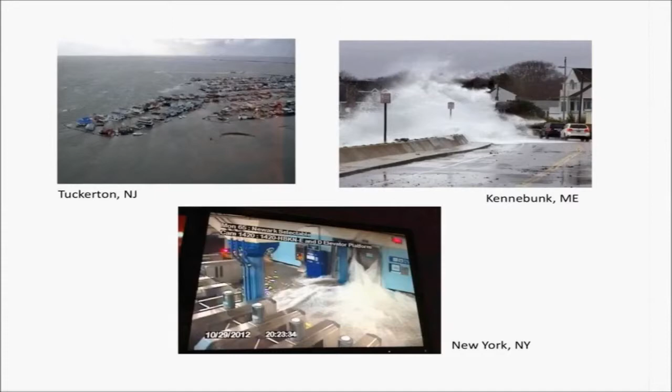So let's just jump right in. I'm going to start with an assertion, which is that I don't actually think we need more tools. A lot of people are saying, so what are the lessons from Hurricane Sandy? People say, well, it was widespread and had cross-sectoral impacts and so on. But I don't think those are really lessons. Some people say, okay, so we need better tools to help us predict. Well, let's look at that as an assumption—I'm not sure that's true.

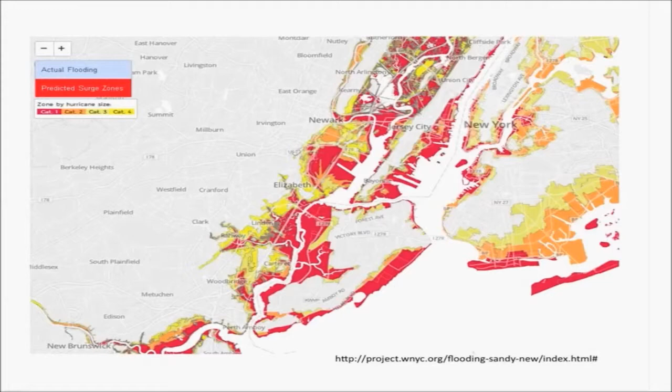Here's a picture of New York just before Hurricane Sandy hit, and a prediction in red of how far inland a storm the size of Sandy would come. Now we'll go to the next slide and show you how far inland Sandy actually came, in blue. So we had a pretty good idea of how vulnerable we were—in fact, that's accurate down to some pretty small areas. We don't need more tools is my general assertion.

We need more conversation in local government, and especially about what kind of action are we going to take. So that's what this whole framework is going to be about.

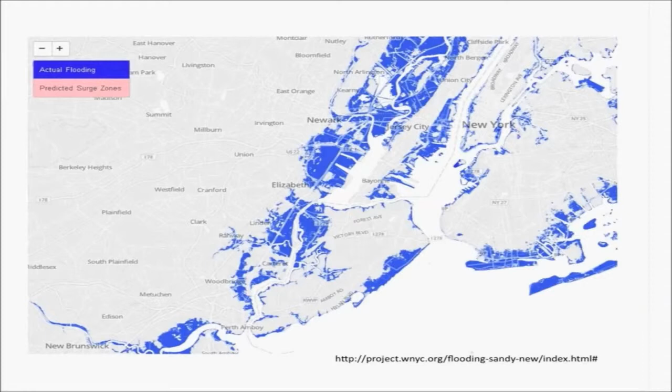Now, what I'm describing has been developed over the last 7 or 8 years here at the Muskie School of Public Service through several organizations funded mostly by EPA, with software work done by Blue Marble, and with a lot of participating organizations in beta testing all around. But applied work of the tool is now happening mostly through the private sector, through this firm, Catalysis Adaptation Partners. And there's a lot of it.

We're just going international now through a National Science Foundation award to the University of South Florida. We're going to be working in Sarasota County, but not just there—also overseas in London and in Santos, Brazil, just outside of Sao Paulo. There are many others domestically coming on, small communities like this that are starting to use and see the benefits of this kind of approach I'll be describing. And again, that's all happening through the firm Catalysis now, although others are free to use this approach.

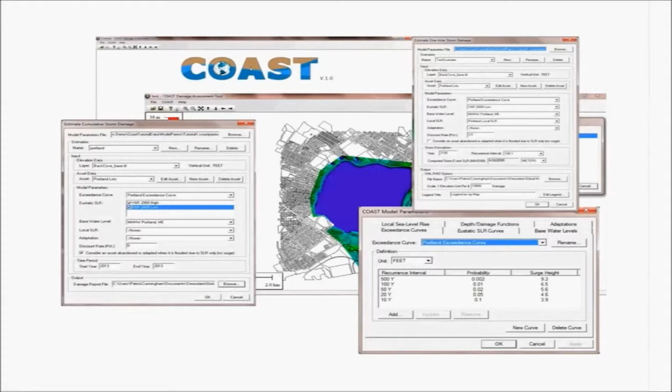And it is a software program that when you download it has dialog boxes and pull-down menus and things. It is a versioned tool that we're doing more work on now—new versions will be coming out on an ongoing basis, and those will continue to be free downloads online. In developing it, we've really focused mostly on the psychology. We've started with looking at why we've had such a problem. We've been talking about the need to take action for 15 or 20 years or more, but it's hard to take action for at least these reasons.

We think we have a lot of time, but we may not. We say 30 or 50 years, but think Hurricane Sandy. Or number two, we don't know how much bang for our buck we're buying with different mitigation actions, and that's unclear.

The actions we might take are themselves complex. We're really not clear what we mean by a rolling easement or wet floodproofing sometimes. These aren't things that are in the common vocabulary yet. And finally, doing nothing kind of works. It's actually easier, and it's what you'd expect if all we can really do is show people two-dimensional inundation maps of just how wet they're going to get, without helping them step through options for themselves.

Because, however, there really are only these options on a per-asset basis, and that's important. You need to be talking about real estate, jobs, natural resources, infrastructure, or vulnerable demographic groups, for example. You can either fortify, meaning modify the flow of water, accommodate, meaning modify the impact of the water—think elevation or floodproofing—or relocate, which might be through rezoning, acquisition, or other things.

COAST, the whole thing, is really a way to help groups evaluate costs and benefits of these options and navigate through that psychological nexus.

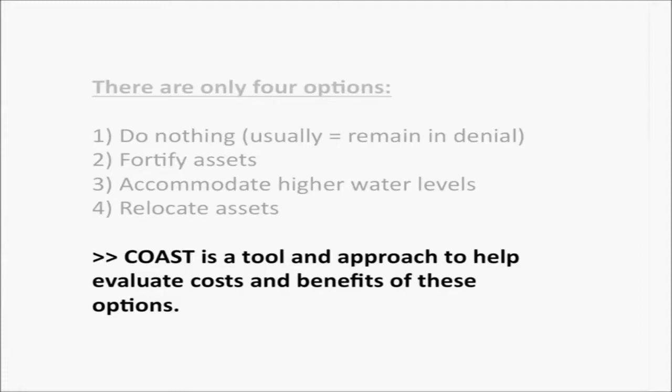And so this whole process is really about recognizing, harvesting, and harnessing that fear and converting it into civic engagement for these options, because we've often said and known that the problem and the opportunity of these sea level rise and storm surge issues is at the juncture of social, economic, and political forces. This whole approach is organized around the notion that harvesting these emotional currents is what is going to help create action, and that's what we're seeing happening all around, and why I think there are so many of these new projects starting up.

So, since I'm saying it's about people, let's jump right in. The process is, first, we engage stakeholders, and they drive. This is central, this is critical to the whole thing. People determine their own thresholds of risk, sensitivity, and tolerance, and that's a neutral and facilitated process.

So, as an extension agent or a company or whoever is going to be working with the community, we would present them with a suite of best available science, recent peer-reviewed estimates of how much sea level rise there might be over the next century, and then they pick. If they think the Greenland ice sheet's going to melt, well, okay, they might pick one range or another, and we'd help step them through figuring that out.

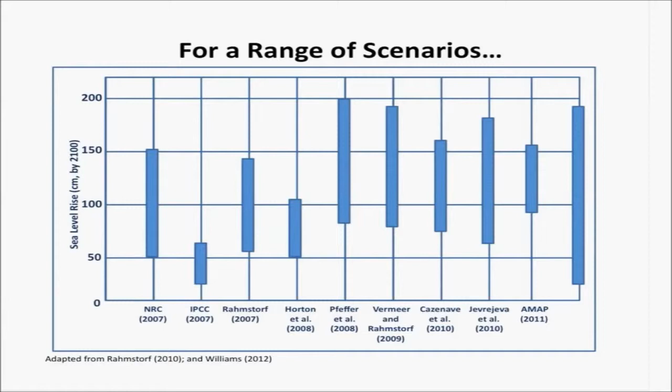And similarly with storm surge, we program how vulnerable people think they are—how big of a storm do they want to protect themselves against? We can use those flood extents from people's memory and from the tide gauge, and we can derive those probabilities and surge extents both from FEMA flood insurance studies, which are available in most locations, or where they're not, or they're insufficient, we can do time series analysis off the tide gauge and come up with our own probabilistic estimates. There are other ways to do it, but most importantly, it is stakeholder-driven.

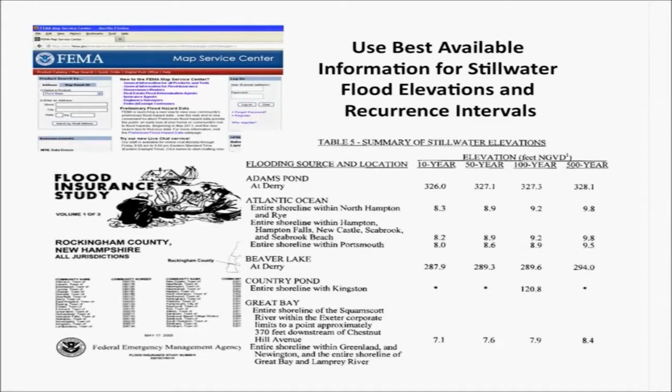People agree on how much impact they want to model, and again, people select the vulnerable asset. Do they want to look at real estate or economic activity? We've published in quite a lot of these areas already, and many of the projects are underway in the others, and there are many different ways to do it. Now, once that's done, you can go ahead and merge, or rather input, the depth damage function, and this is critical to the whole thing.

I referenced it at the outset, that it's in that NOAA document. What it does is it says what percent of an asset's value is going to be lost at different depths of inundation. Now, for real estate, this is quite a robust function, based on millions of insurance claims which say, on average, how much a structure is likely to lose in value for different depths of inundation.

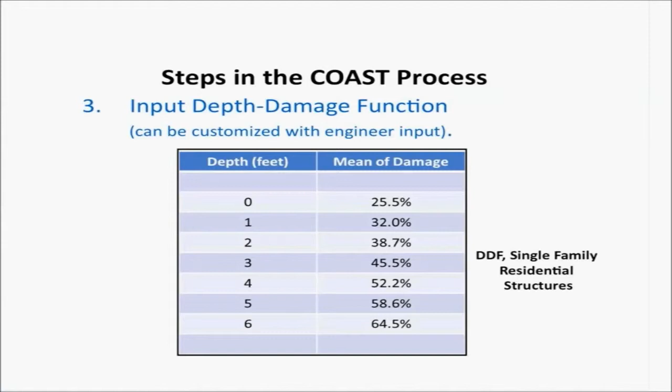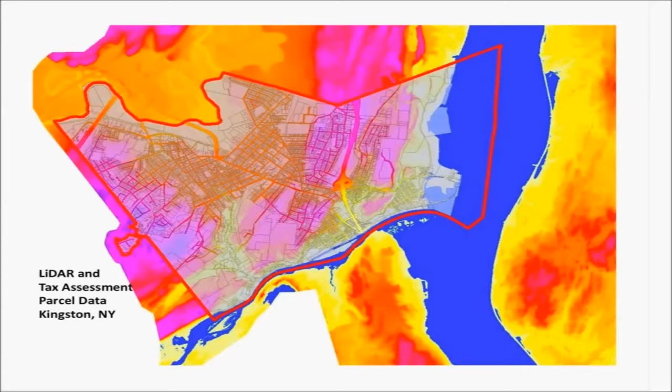You merge that with the spatial representation of that asset layer and the elevation layer in a GIS, and when you run the model, it will estimate the dollar damage for a size storm and project those in 3D maps, calculating cumulative damage for all storms out to that year. Those are different processes mathematically, but you do both at once and get results that help move forward.

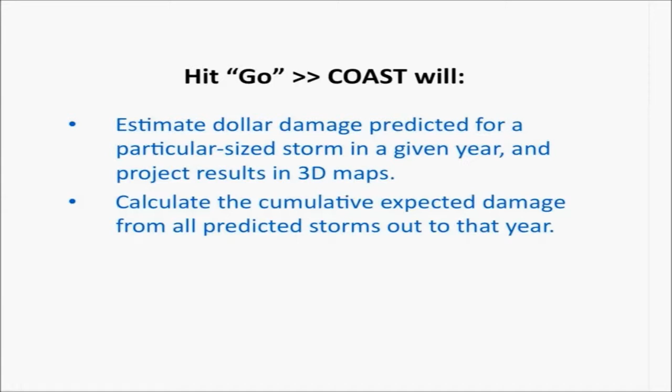So I'm going to give a little case study here, a quick summary up to this point of what this part of the process looks like in Kingston, New York, a place we did this earlier this year. The final report just went in last week, so we can do this relatively quickly.

Here at the top are the scenarios that those stakeholders decided they wanted to look at, and this is their lovely downtown. There's a gazebo in the downtown, and you can look at that from the air, along this shoreline, which is about 85 miles upstream from New York City. This is a little tributary off the Hudson, and they didn't think they were terribly vulnerable from storm.

But a few years ago they got really clobbered by Hurricane Irene. There's that same downtown strip, looking off the bridge, where it was several feet of water right on the main street, and they hadn't been prepared for it. They went and built a seawall around the wastewater treatment plant, and they thought they'd be safe.

But then Hurricane Sandy hit just 14 months later, and the surge was 11 foot. The seawall around the wastewater treatment plant was only 10. So it was a big problem, and they were very interested in engaging in new kinds of discussions.

So we did some modeling there to show what this output looks like. Here's an actual extrusion where those blue boxes show you how much dollar value is lost at each spot. You can click on each one and see how much depth there is and the amount of dollar loss. That's 2013 with no sea level rise.

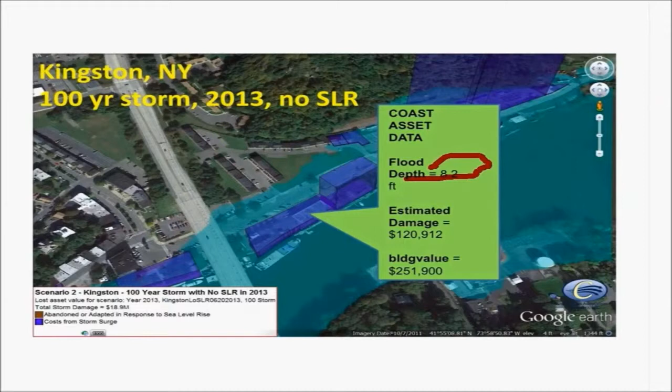So if we add some years and go out to 2060 with high sea level rise, you'll see there's more damage and more depth at each of these sites, and more parcels start getting hit, because the same size surge will come farther in when you add sea level rise.

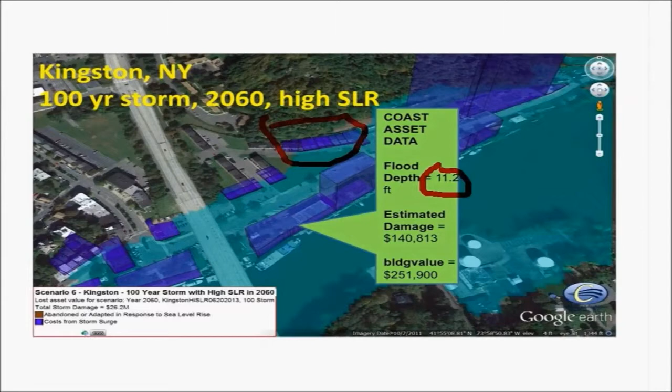Now, if we go out even farther, say 2100, it's very interesting what happens. It goes even farther in, but you don't see bigger, taller blue boxes. Actually, you see flat brown boxes. That's because at a certain point, those parcels become permanently inundated, and it's not reasonable to go ahead and leave that dollar value of the asset there from then on.

What if that had happened in the year 2065? You wouldn't keep tallying all of those losses. That parcel will either be adapted or abandoned. Adapted could mean elevated or relocated, but the point is the dollar value is no longer vulnerable to be compromised in the same way.

So what you do is remove that from the vulnerable asset data layer, and that influences your calculations of how much loss there will be, but that's the way the model is structured. It works on an annual basis with all probabilities of events out through the century, and it operates that way. You can still tell what the total depth is, how much total loss there was, and when that abandonment or adaptation happened for any given parcel.

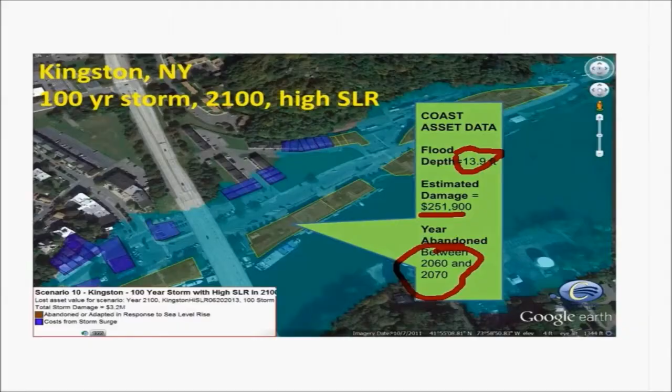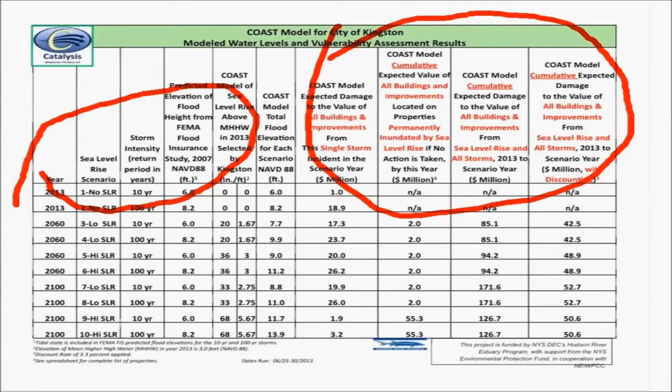And then we can start saying, what might we want to do? Then we'll compare the benefits and costs of taking those actions versus doing nothing. But this is when we go ahead and select the candidate actions over time.

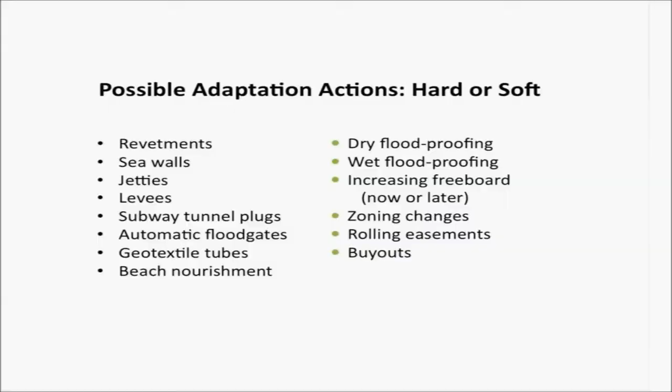That can be a suite of hard structures and approaches, like on the left we've modeled, published on most of these, and on the right as well. And it's very different for different ways of doing it, depending on local public process and regulatory issues and so on. There's a lot involved at this stage in terms of public process.

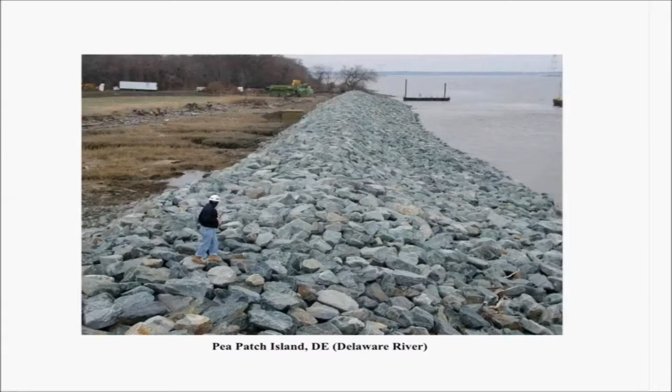It's very careful and sensitive and nuanced. It needs to be quite neutral. You need to talk a lot about trade-offs and help people do that, where here you might go ahead and build a hard structure like a revetment, which can be great at protecting things like a historic district, but it's going to push water and sand next door and probably compromise a neighboring wetland, perhaps piping plover habitat, or who knows what. It's just this kind of trade-off discussion that people suddenly have an opportunity to have. That's a facilitated process, and it ends up making the results more robust.

But again, this is important because it's stakeholder-driven. It provides whoever's structuring the process a certain amount of insurance, a buffer if you will, from the local politics, because since it's truly neutral, citizens own the inputs, they own the outputs, and there's nobody to get angry about what it says. These are their decisions. It's operating in service of their dilemmas that they're trying to solve, and that's a distinguishing feature between this tool and approach with many of the others that are out there, as I said on the first slide.

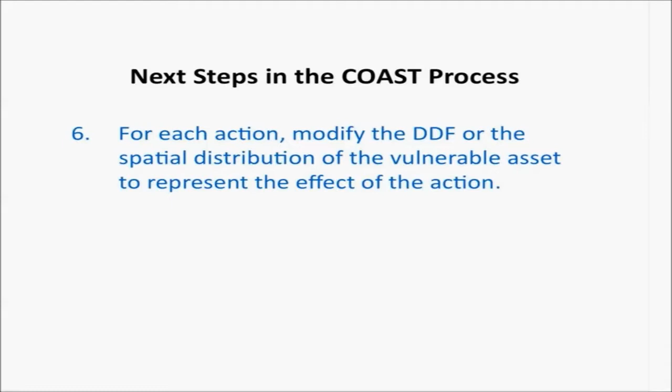So what we actually do is for each of those candidate actions, we modify the depth damage function or the spatial distribution of the asset to show as if that action had happened. Then we rerun the model and we look at those different numbers.

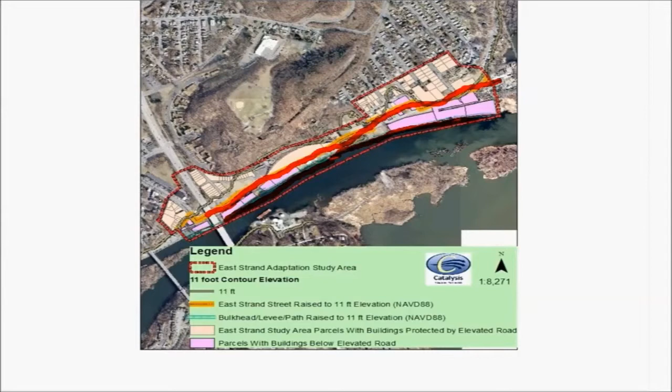So here's one example where in Kingston, there's that same vulnerable area. They decided to look at this, which was a road. They said, well, let's elevate that road 11 feet, treat it like a seawall. Or we could build this thing right here, another thing on the shore. That's called a bulkhead. They wanted to build that there. Or they wanted to look also at a rolling easement, where title would transfer to the city once sea level rise had gotten to a certain level. So we have these three adaptation options that we wanted to go through and look at for them.

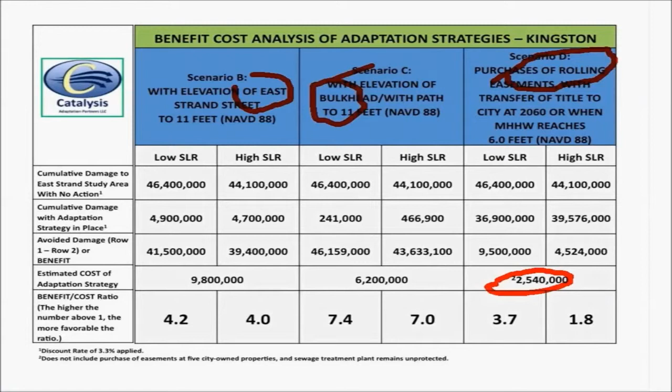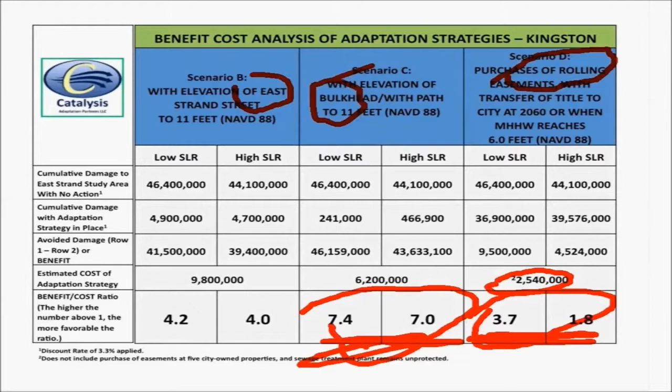And scenario D, for example, on these costs, there's a lot that went into that. I'll say a little more about politics next slide, but the punchline is you get these benefit-cost ratios for low and high sea level rise scenarios. And people can say, oh, we want to go with this one because it'll save the most money. Well, maybe they'll end up going with this one even though it's not as cost efficient, because these are about values, and that's again a facilitated process.

But here on the rolling easement, it was very interesting politically to see that the town decided to not elevate the road or bulkhead. If they're going to do the rolling easement, funds would go to landowners now for title that wouldn't transfer for decades, but the city would be choosing to not do other things. You would not armor, and the owner could not then armor. They're actually making a choice. Remember, the point was that we're helping people navigate among fortify, accommodate, and relocate. And when you make one choice, you're choosing not to do another thing.

Now, that's not to say this was easy to reach this alternative as a modeling scenario, because it was not. In fact, the people who suggested this one in the process got a lot of pushback from the people advocating for fortify and building the bulkhead, and vice versa. The people who wanted that one had pushback from these very people looking at the easement. So it's a careful public process that needs to be structured.

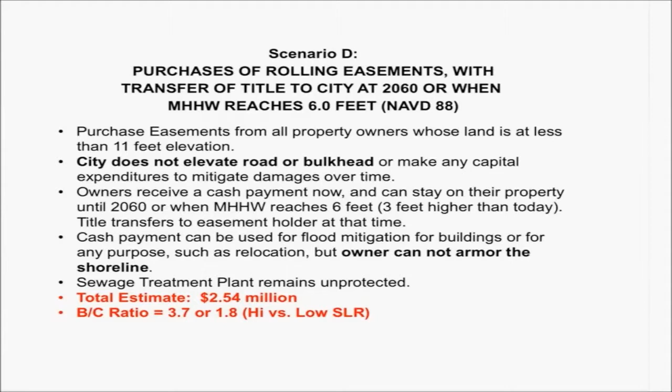Once you have these results, you can navigate to what we're actually going to do. This has been the big problem, getting from planning to implementation. We can start implementing when people own the results and see what the policy and finance levers need to be, because they've developed them. I'll give a few examples.

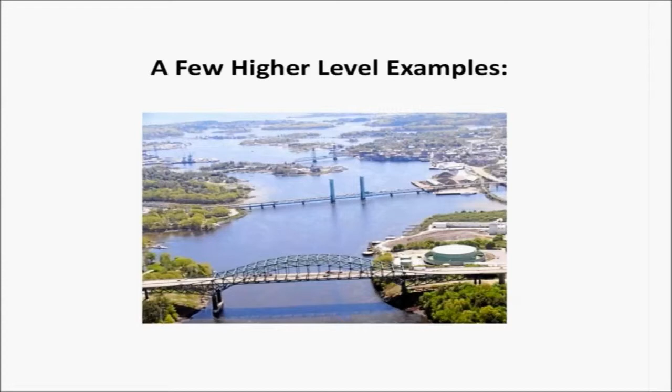First, I'll go up to the stratosphere for a moment and talk about other areas where we're using this, higher level stuff with Maine bridges, where our governor, who doesn't think climate change is much happening, is still responsible for his infrastructure. He's asking the reasonable question for all our thousands of miles of coastline: how big of a storm does it make financial sense to build a bridge to protect against? Should I build a $5, a $12, or a $20 million bridge?

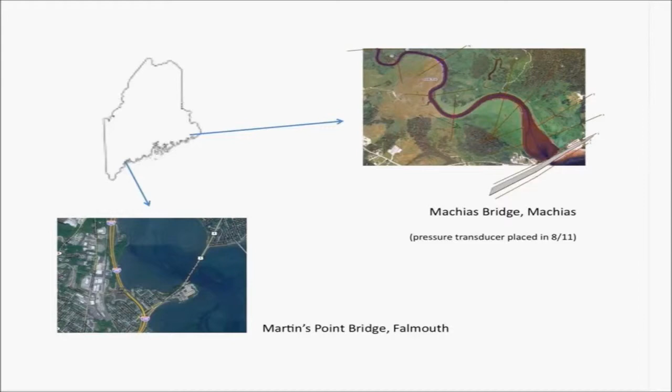We're using the software to help him with that question, and doing similar things in Broward County, Florida, and in Minnesota, and transit as well. I'll come back down to a couple more community level issues shortly, and some lessons learned on the politics, then we'll go into discussion. But a couple more higher level pieces first.

On transit, I was flown to D.C. and spoke at Congress this summer, where they had just approved $20 million for Manhattan, New York City, for floodproofing post-Sandy, and I was there. They were asking this similar reasonable question: what's a good investment? I was helping them think through some of those things in congressional briefings.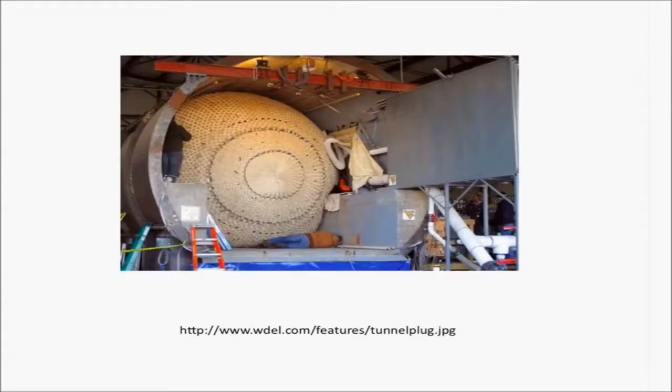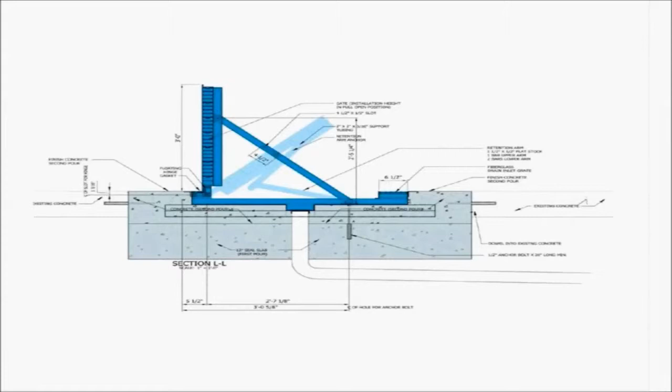For example, they're thinking about tunnel plugs in the subway, new technology that could protect the subways from flooding. They would self-inflate. Or these floodgates, which could go over subway entrances — that's the engineering design there. They go up without people or power, just a quarter inch of water, and they can raise. It's a very elegant design.

You can see here in a flood, there's a car — it is actually a flood, and the gate went up, and the places behind it stayed dry. They work, and they're flying off the shelf now. This is new technology, and you could install it in New York over all the subway entrances. It's expensive, but is that a good investment? That's the kind of work we're doing.

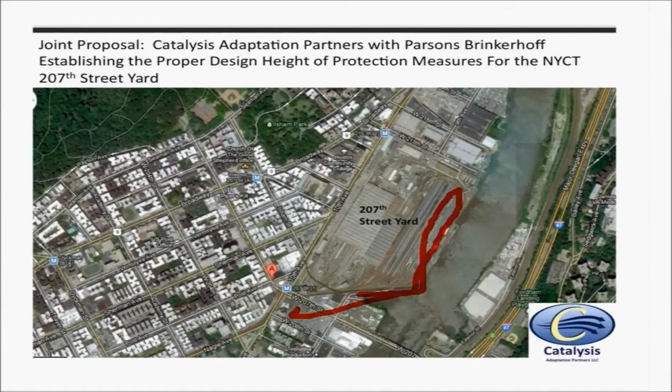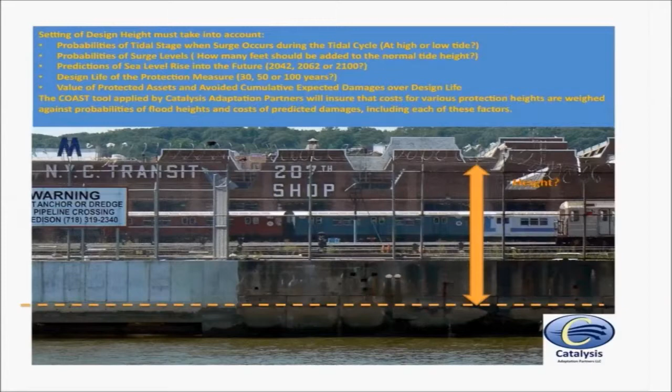Similarly in New York, the rail yards, 207th Street Yard, we're looking at with an engineering firm right now, Parsons Brinckerhoff. They were lucky they didn't get clobbered by Sandy — they were exposed, but they're thinking about a seawall to protect it. The question is, how tall should that be? Every additional foot of seawall costs a certain amount, and we can show the relative risk mitigation, the bang for your buck, of each additional foot increment. That's the kind of analysis we're doing on some of these other projects.

Similarly, we've just started a project with Logan Airport, and have others going on. Many of these places are built on fill, and they need to know: should we build berms, dikes, jetties, elevate, or what? What are we going to do? That's what this analysis is for.

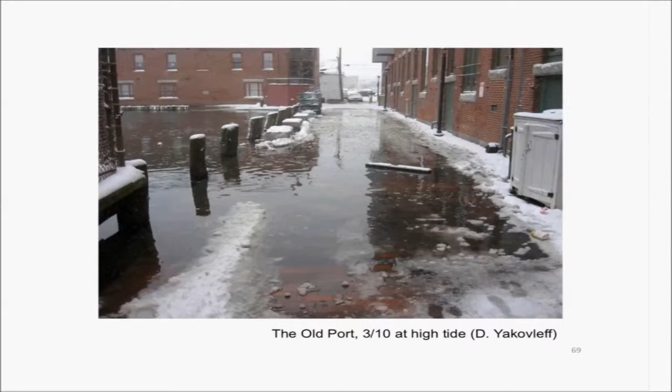Okay, back down to the community level. We did one in Portland, Maine, where we have a lot of saltwater issues. We're getting a foot of salt water in some places at high tide — we really are having high tides that just show up. We shouldn't be having cars and boats at the same elevation with our high tides. That's 3-6 inches of water down the waterfront and many other areas. So there are some regular issues now, and people are really talking about it a lot. When storm surge comes along, it gets even worse.

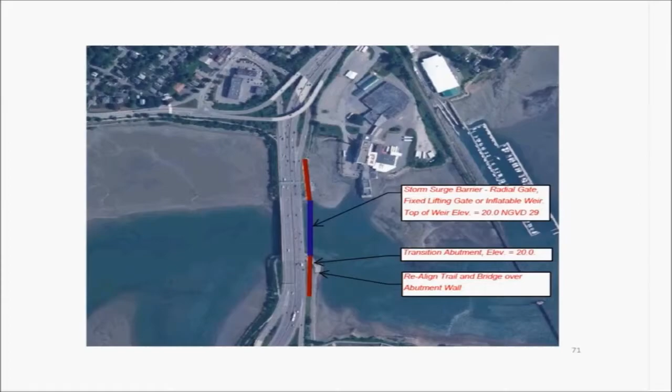They decided for their modeling to look at fortification as the approach. They wanted to look at this cove and putting a big hurricane barrier underneath it, which might cost about $100 million, plus a big levee complex with several different levee structures around there for another $40 million or so. We paid an engineering firm to do these estimates, and they used the same sea level rise extents from Vermeer and Rahmstorf as the earlier numbers.

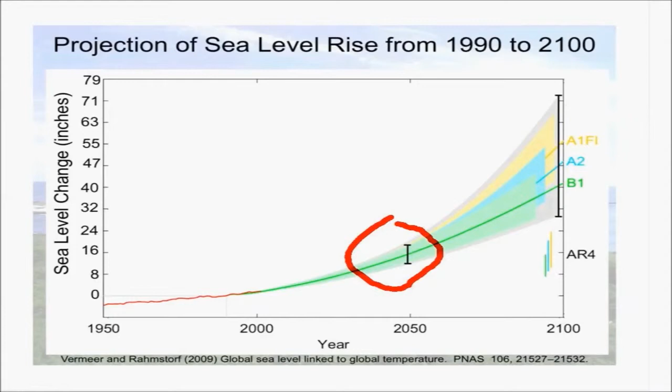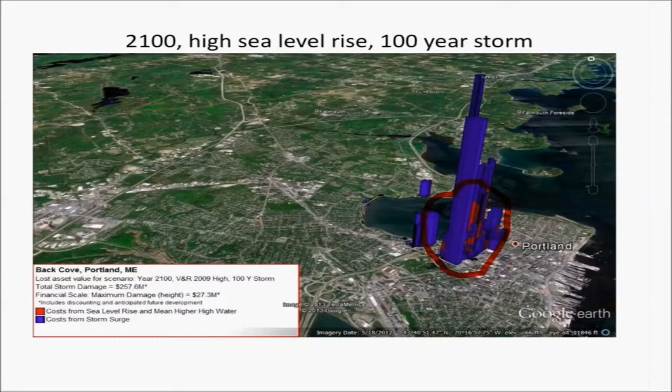Now, if you go out to 2100, what I've done here is shown these red parcels underneath—those are the amounts of damage from sea level rise itself. In this case they're extruded; in the earlier ones they were brown and flat, but here it's just to show the relative contribution. Going back to the tallies, in 2100 your benefits and costs actually increase quite a bit because you've seen a lot more damages and you're starting from a higher level with more sea level rise each time. So you're justifying more of these costs.

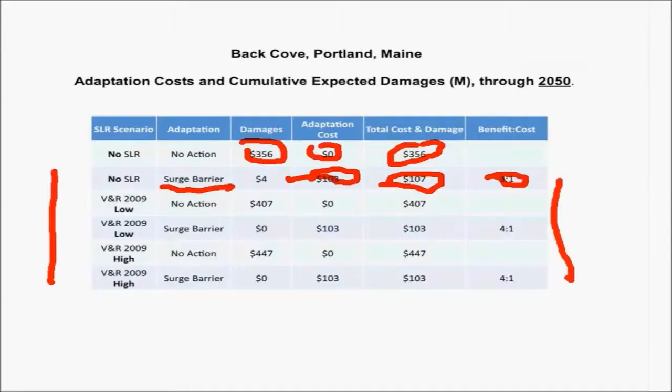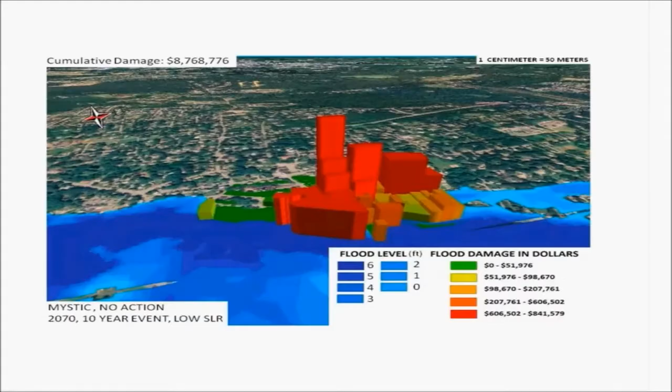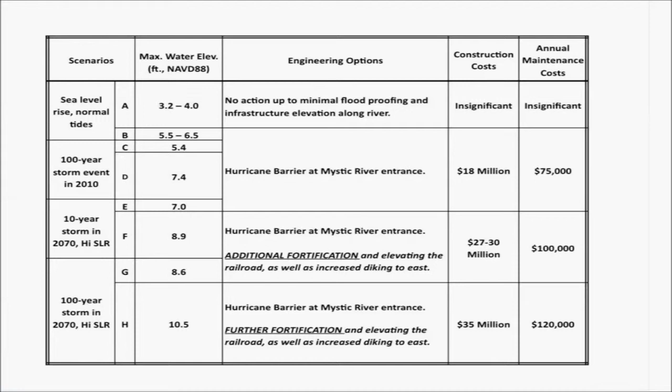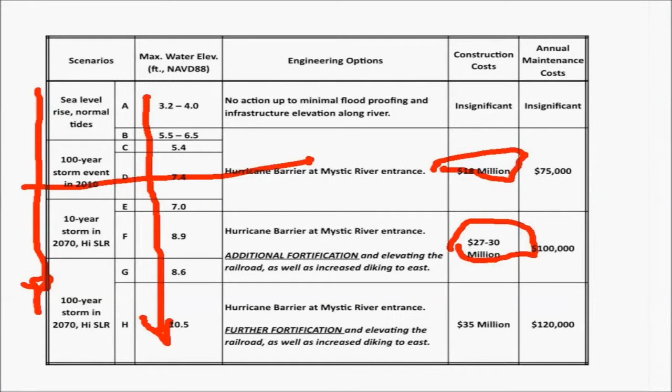Similarly in Groton, running out of time so I'll skim through this one, except to say this was about a surge barrier we modeled for Groton, Connecticut in a commercial district. We also looked at elevation and fortification, but this figure makes a similar point if you read it down for increasing amounts of sea level rise and more frequent, more intense storms and surges over time. You make certain investments—build that hurricane barrier now and it protects you up to this level of inundation. If you've bonded for it, by the time you've paid off that bond 20 years later, sea level will have gone up and you can do other things. So again, this analytic framework lets you look at when it makes sense to make which kind of investments, and why.

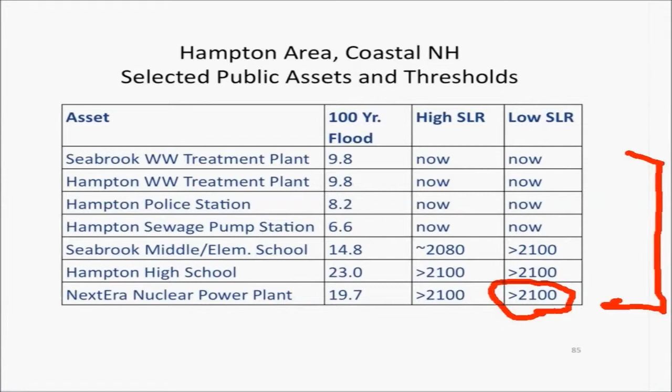But if you look at the coastal scenarios, here are those 3 towns. It was great to see them working together—there's a lot of regionalism issues coming into play, I could go into that another time. But here, these red extrusions are dollars lost from sea level rise, and blue is from storm and surge.

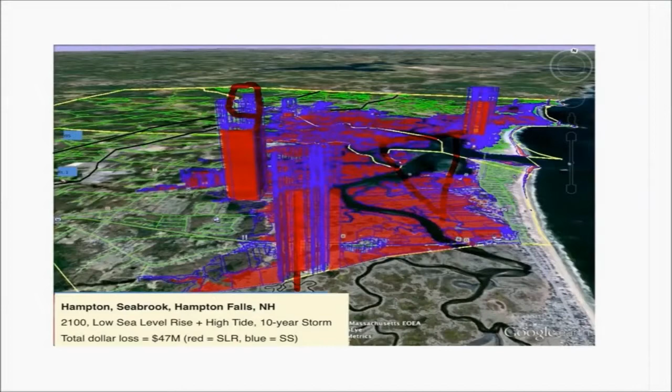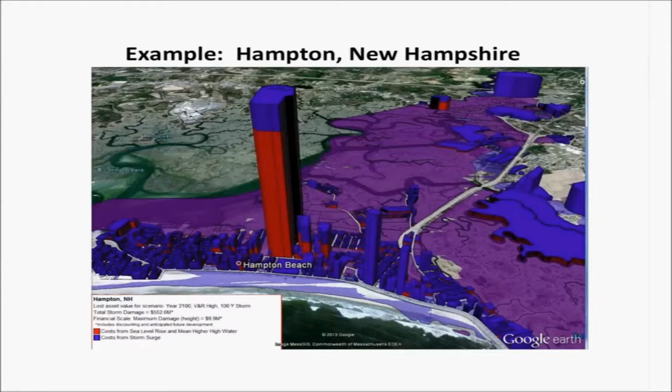We'll zoom in on this one over here—actually there's another one behind it, you can't quite see. It's this one, Hampton, New Hampshire. This was the police station in Hampton. What I wanted to say here is it's very interesting, because it gets into the politics again and the local stakeholder-driven issues—they wanted to model putting up steel floodgates and barriers around the police station to protect themselves. We modeled the costs and benefits of doing that, and it looked like about a 12 to 1 or 16 to 1 dollar value ratio if you do that.

It was great to see. I remember presenting these results in a public meeting, and the town police chief in Hampton was there. I'll never forget, he said, okay, so that's great, but I guess that's a no-brainer really, so let's forget about the numbers. We're going to do that. But my question is, how are we going to get our squad cars out in the event of a flood?

Which launched immediately this whole new comprehensive overhaul planning subcommittee process to start looking at E911 revision in the event of a flood, to the point that the numbers don't matter so much, hence the name of the firm, Catalysis. We're really about starting conversations.

They took those results and used their civic engagement, which had just been created. Remember, it was harvesting that uncertainty and converting it to civic engagement, and they went and launched their own process. That was self-fueling and continues with their ongoing adaptation process with ordinance review and other things.

So suddenly they were all able to make connections. We are all, these are interconnected, nested subsystems. We're not going to solve one thing at once.

COAST is great because it goes very deep into one asset and one action. But at the same time, it uses that framework to help people launch out and make connections to all the other nested, interconnected vulnerabilities, and how we're going to take a systemic approach to this. It's a different way to do it, and that's another distinguishing characteristic of the process.

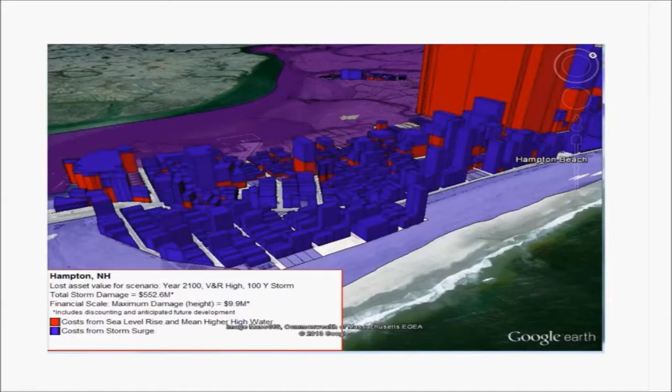Finally, in this example, we also modeled private residences on the shore. This is actually the fire station here, and a zoom in at the shore just underneath them. These are all family heirloom residences that are going to get clobbered by storm surge. Most of them won't get hit by sea level rise until 2100 in the red, but all these are going to lose a lot of money from surge.

So they had asked us to model a zoning action as their adaptation response. It was going to include putting in 3-foot elevation of freeboard, so that when you get hit by a storm, you'll have to elevate 3 feet. That would be a rule. They wanted to model a regulatory response.

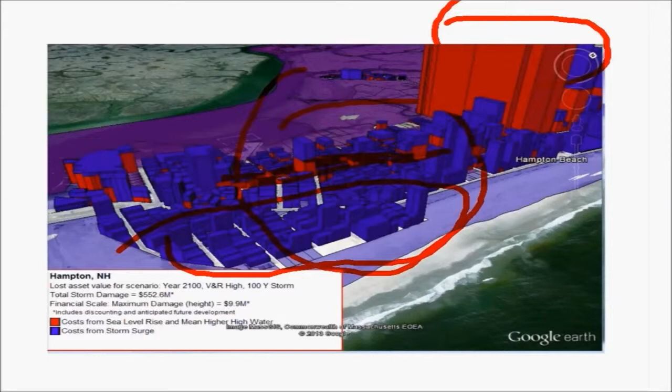Okay, so we did that, and sure enough, here are the results. Great cost-benefit results. Yeah, that'll save a lot of money if you do it. Immediately in public process, I remember again people were saying, well, who's going to pay for that, right? Then the how-to-pay question comes up.

And this gets into the role of the Environmental Finance Center Network too, the motto of which nationwide is helping communities answer the how-to-pay questions of providing environmental services, one of which is resiliency of course. And here we are, people saying, well, how are we going to pay for that? It might cost 30 or 40 grand to elevate my house when I get clobbered.

Who's going to pay? It was a very conservative person in the room that brought this up to make the point that this avoids climate change politics. This gets to people's own sense of their own vulnerabilities and what they want to do about it, and it helps them take their own action.

So they said that. Somebody else said, well, how about we create a common pool of resources where everybody invests, and then when you get clobbered, you can just tap the fund to elevate for the 30 or 40 grand. And the other person, who again was conservative, said, well, yeah, that's like socialism. That's like the government taking my money and giving it to somebody else. I'm not going to do that.

Go away. Well, the first person, who was also conservative, said, well, all right, so you don't have to invest in the fund, but then you wouldn't be able to elevate when you get hit. And the first one took a long pause and said, oh, all right, so I guess I do want my grandkids to have this house. So okay, let's talk about it.

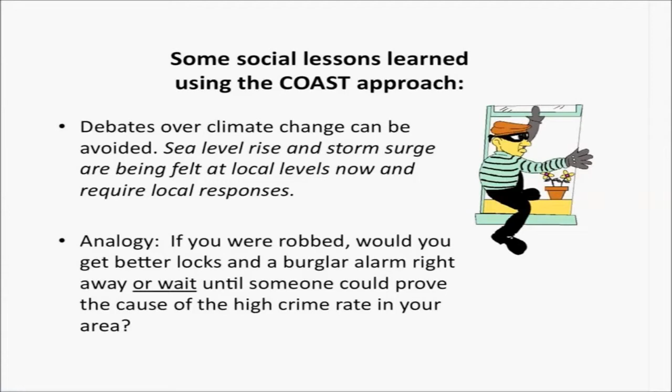So I don't even use the phrase climate change in most of these things. In fact, it's not even in the contract with a lot of places. It's about fiscal efficiency and wise choices, and what is society going to do about these problems that keep coming every year, much more frequently than people have been predicting.

Citizens do want places to get beyond the vulnerability studies and start taking action, but they see that it's going to take a lot of money, and that means they recognize a certain amount of consensus is going to be necessary. It creates a certain willingness, even if unconscious, to engage with these very difficult conversations, and COAST as an approach can help create that consensus. Just like I mentioned in Kingston, they might not end up picking the most cost-effective one. Maybe they will want to go forward with the rolling easement because the values discussion will have been had properly and become socially robust.

We're making many changes to it on an ongoing basis. I'm adding multiple depth damage function capability right now, staged adaptation costing over time, some nuanced net present value work for the economists out there, and many other bells and whistles are being added, sort of like Microsoft Word, where you couldn't even copy and paste with version 1, but everybody still needed it. COAST is seeming to serve a similar role, where even version 1, which is out, is useful. Version 2 will be out by the end of the year.